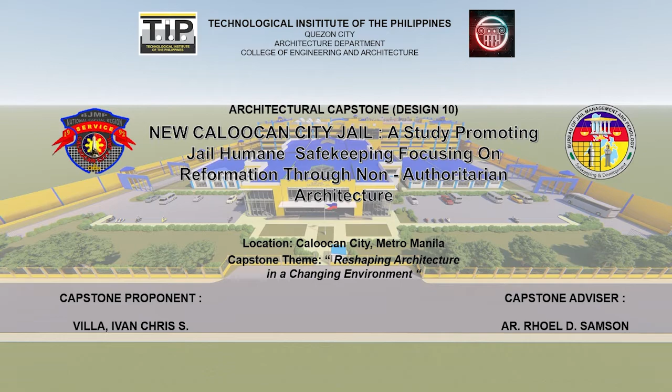Jails are one of the facilities used, aside from prisons, to house persons deprived of liberty or the accused and guilty of criminal acts. Crime is an unlawful act punishable by government, state, or other higher authority. Jails and prisons are part of the corrections component of the criminal justice system.

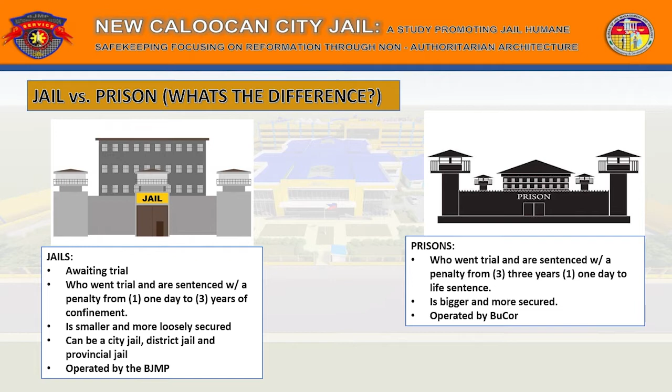So what's the difference between jails and prisons? Jails are for those who are awaiting trial, went to trial, and are sentenced with a penalty from 1 day to 3 years of confinement. They are smaller and more loosely secured, and can either be a city, district, or provincial jail, operated by the Bureau of Jail Management and Penology, or BJMP. Prisons are for those who went to trial and are sentenced with a penalty from 3 years and 1 day to life sentence. They are bigger and more secured, operated by the Bureau of Corrections, or BUCOR.

In the Philippines, the number of incarcerated people is increasing. Due to the ongoing war on drugs campaign, the capacity of jails is at an all-time high, with a congestion rate of over 500%, making it the worst in Asia. Because of this, most inmates are not properly attended to, as there are too many of them, and rehabilitation has been neglected due to the growing number of inmates. Other problems include overcongestion, slow trial, lack of funds, and the indifference of the government.

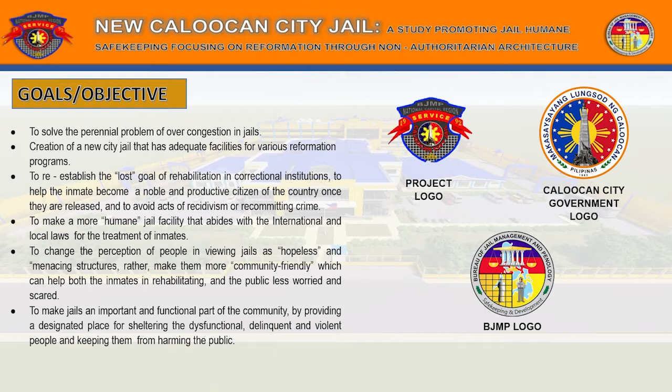So in line with these problems, a new city jail, in partnership with BJMP and the LGU of Caloocan, shall be erected, with the goals of solving perennial problems, reestablishing the lost goal of rehabilitation, and making jails more humane, safe, and able to gain public trust.

The site is located at the northern part of Caloocan City along Camarin Road. It is an inside lot and has a total lot area of 25,000 square meters.

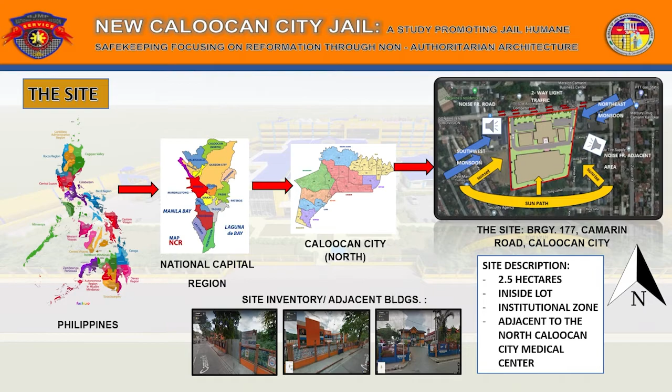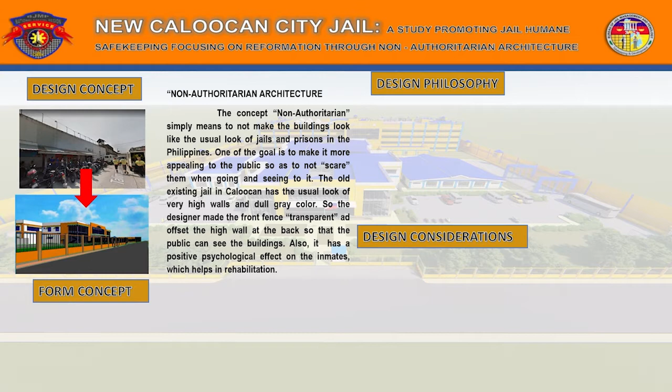The design concept is non-authoritarian architecture. In order to gain public trust and a sense of safety, the confines of the jail are slightly exposed, and the buildings are disguised to look like an office or government building. Using light and vibrant colors can also give a positive effect to the inmates and public.

The form concept is derived from a cage. The vertical parts of the cage are the columns, and the horizontal parts are the beams.

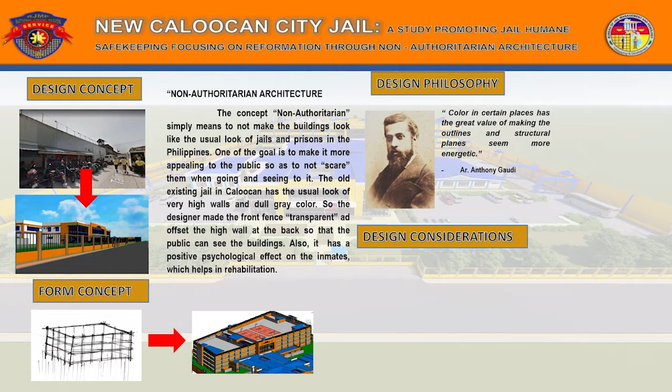The design philosophy is: 'Color in certain places has the great value of making the outlines and structural planes seem more energetic,' by Antoni Gaudí. The designer used this philosophy because of the significance and importance of color in the design.

Some of the factors considered in the design are natural ventilation, circulation, orientation, environment, space dynamics, and economical feasibility.

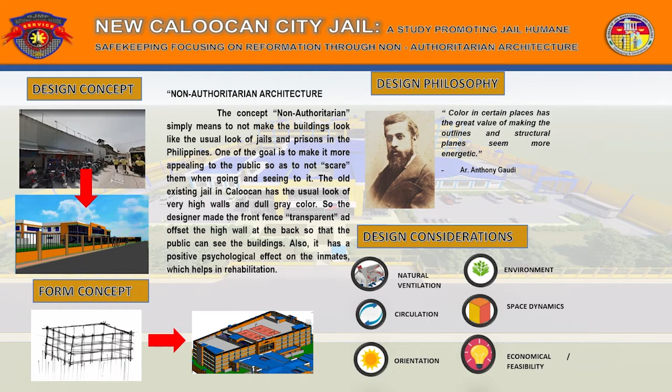The first planning concept is the presence of security barriers or levels in security. The site is divided into 3 levels: level 1, level 2, and level 3.

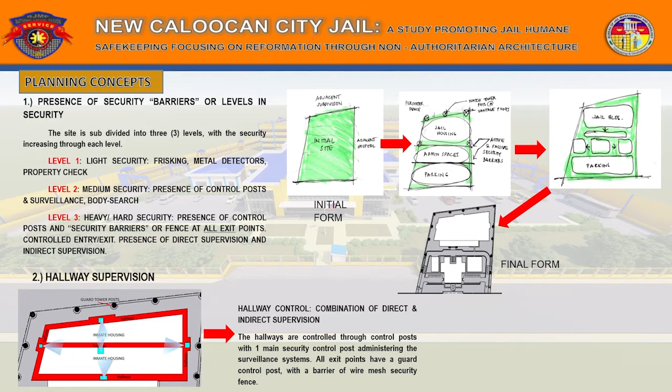The second planning concept is hallway supervision. All sides of the building have a stationed security or control post, and the hallways are monitored by a combination of direct and indirect supervision.

The third concept is called the visitation bridge. It is the part of the admin building which directly connects to the jail building. The concept is derived from two hands reaching out to each other, just like how the two buildings reach out or connect, giving a sense of longing from loved ones, much like the inmates longing for their families while incarcerated.

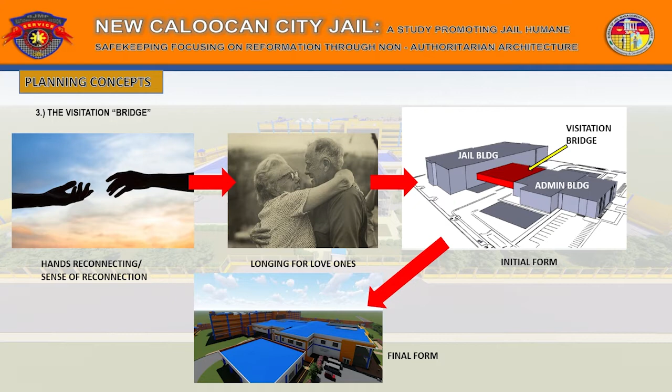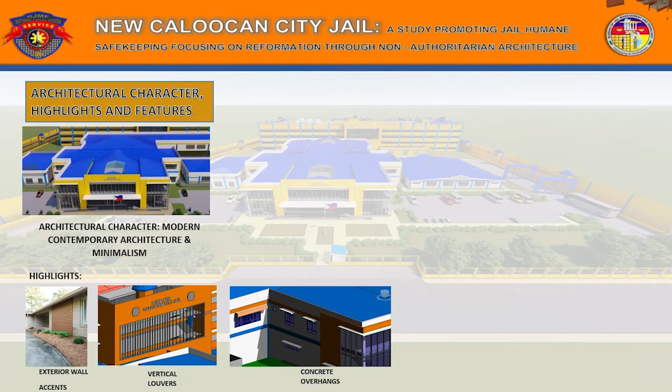The architectural character is modern contemporary architecture and minimalism. The highlights used are exterior wall accents located at the admin building and the jail building, vertical louvers, and sun shading devices such as concrete overhangs.

Design features include a courtroom, a mini farm, garden atrium, a freedom wall containing mural paintings depicting a sense of hope, pride, and positivity, and a display center or souvenir shop.

Material concepts are wood and concrete, because they are universal and economical in nature; cork, for its sound absorption capabilities; and welded wire mesh, for its lightweight, durable, and economical abilities.

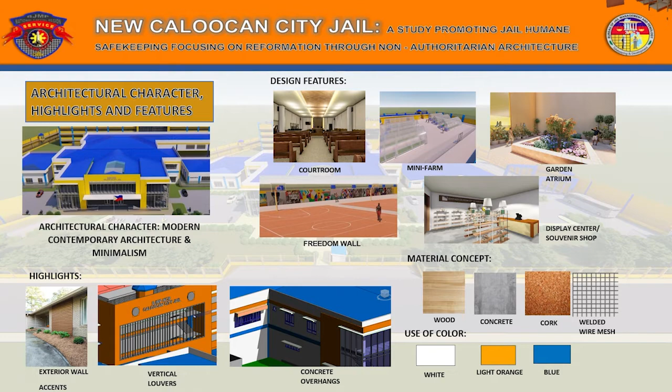The colors white, light orange, and blue are chosen in the project because they depict colors of positivity and vibrance, and are also the main color scheme of the government buildings adjacent to the area.

Here are the building systems used in the proposed project.

Shown are the vehicular and pedestrian circulation around the site. The site has a single driveway with both sides having entry or exit points for visitors and staff. The jail vehicle's entry is located at the right-hand side and exiting at the left-hand side. Both entry and exit for jail vehicles has a controlled security check gate.

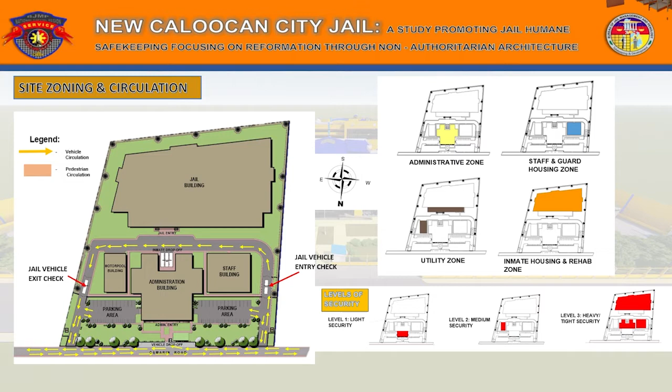The site is composed of 4 main buildings, namely the administration building, the staff building, the motorpool building, and the jail building.

The site is bordered by a 5.5 meter high concrete main perimeter fence and a 3 meter high secondary steel matting welded wire mesh perimeter fence. The main front fence is a 2 meter high concrete fence. The secondary front fence is a 3 meter high steel matting fence.

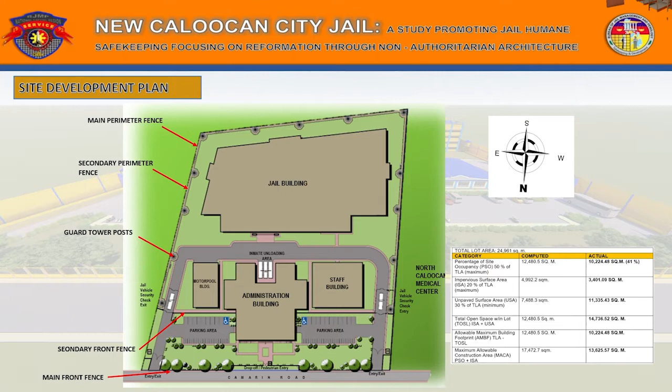Guard tower posts are located within the levels 2 and 3 security zone, which controls and supervises different vantage points throughout the site. Here is the ground floor plan of the administration building.

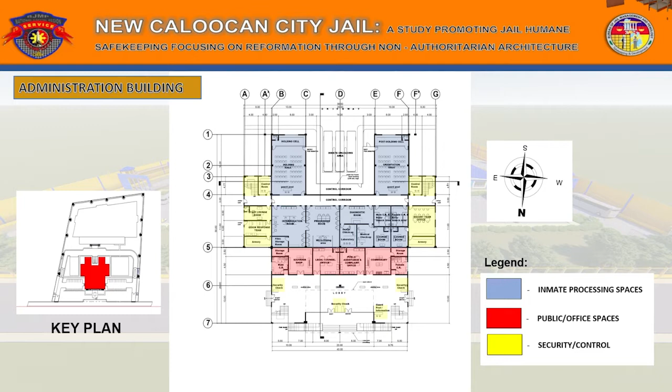The entry for visitors is located at the middle and the entry for staff at the sides. The lower part of the admin building is where the shops and the legal counsel and public assistance offices are located. The upper part of the admin building is where newly arrived inmates are held and processed before they are assigned to their respective cells. Note that the upper part of the ground floor of the admin building has no direct access to the lower part of the admin building.

Here is the second floor of the admin building. This is where the main offices of the jail are located, as well as the courtrooms. Also, the waiting, processing and checking area for visitors is located here.

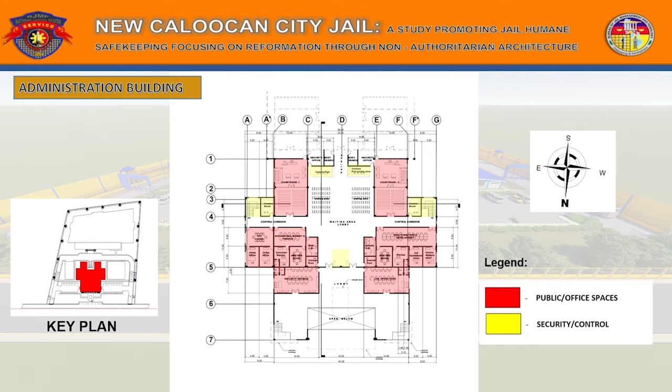Here is the floor plan of the visitation bridge connecting the admin building and the jail building. Here, the visitation areas are located. Also located here are the waiting rooms for inmates who are awaiting their trial in court.

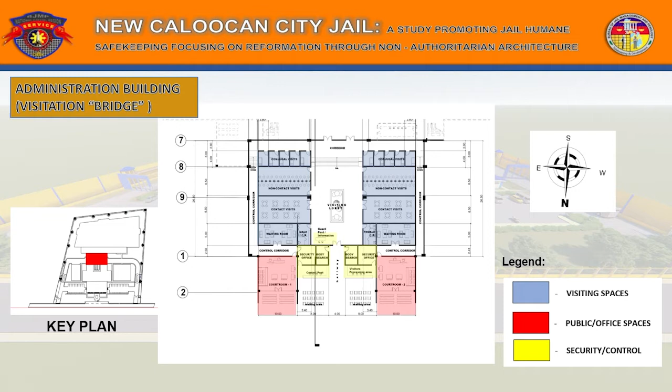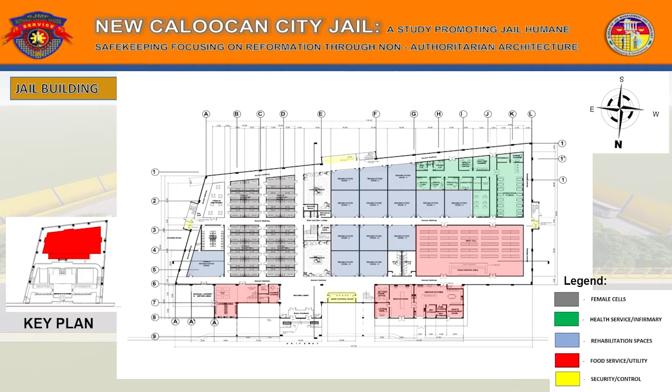Here is the ground floor plan of the jail building. It is where the inmates' housing and main activities take place. The building is shaped parallel to the main perimeter fence so as not to create blind spots. The main entrance and exit is located at the middle part, and the emergency exits are located here.

Here is the second to fourth floor plan of the jail building. It is where the male cells are located. It is also where the single accommodation cells are located. The emergency exits are shown.

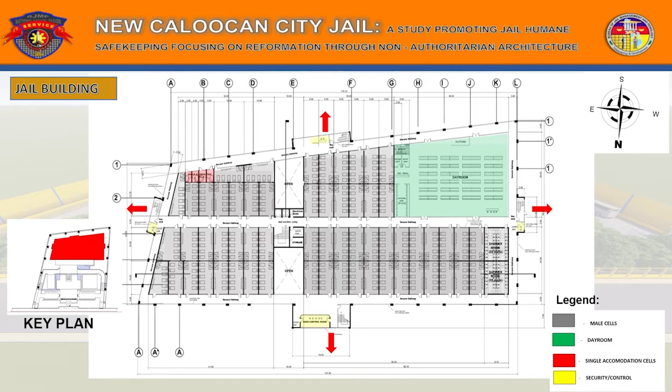Here are the blow-up plans of each cell. Note that each cell has a window opening on all sides to maximize ventilation.

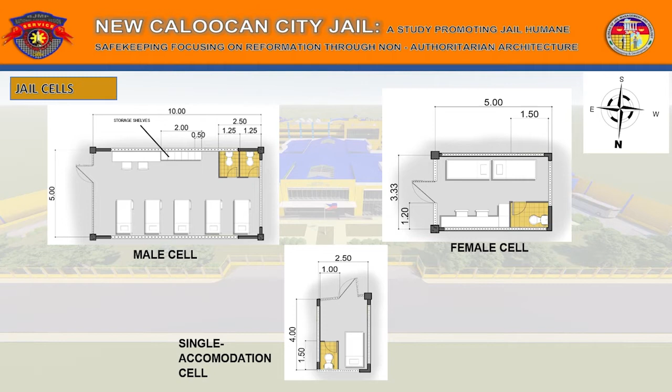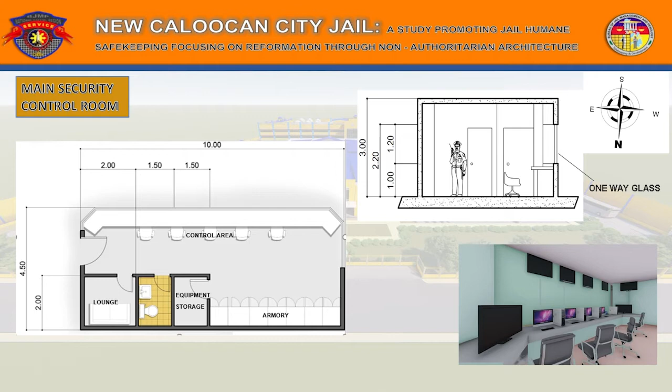Here is the blow-up plan of the main security control room. Note that the windows are slightly angled for a more panoramic or wider field of view.